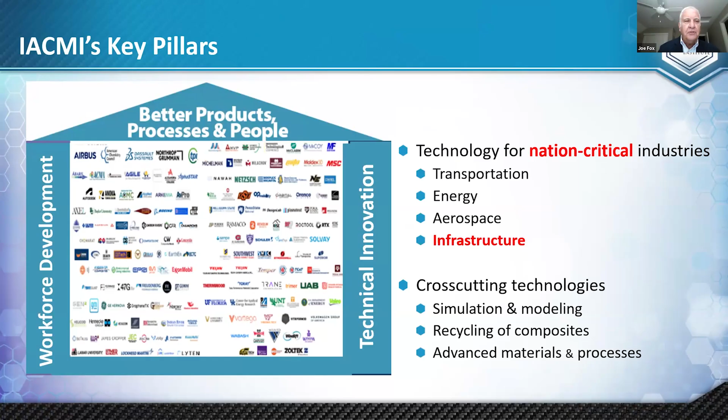Those 2 key pillars, technical innovation and workforce development, form part of a very important equation because when you add them together, it really equates to economic growth. On the technical innovation side, IACMI has completed more than 70 projects and more than 24 innovative new products have been commercialized. Some of them are shown here.

On the workforce development side, IACMI has trained more than 18,000 people of all ages, they say from K to gray, through customized education and engagement programs like ACE, ACCP, and Integrate. So in celebration of its 10-year anniversary, IACMI has put together what it calls its Project Impact Report. I was part of the team that put this together, and it really is a 36-page document that is full of impactful stories and stats from the first 10 years.

I was going to bring you hard copies if anyone was interested in this report, but if you are, I'll provide my contact information at the end and I can provide you electronic copies. It's worth a read. So now I want to move into the second part of my presentation and focus on IACMI's Infrastructure and Construction Working Group.

So IACMI's tagline is convene, connect, and catalyze, and they use various mechanisms to accomplish their mission. I'm not going to talk about all of them. I'll just highlight networking, interns, world-class facilities, world-class expertise, techno-economic analysis. I'm going to focus on the working groups. IACMI has 5 working groups, and they're all shown here. They typically have quarterly meetings, and they can be both virtual and in person.

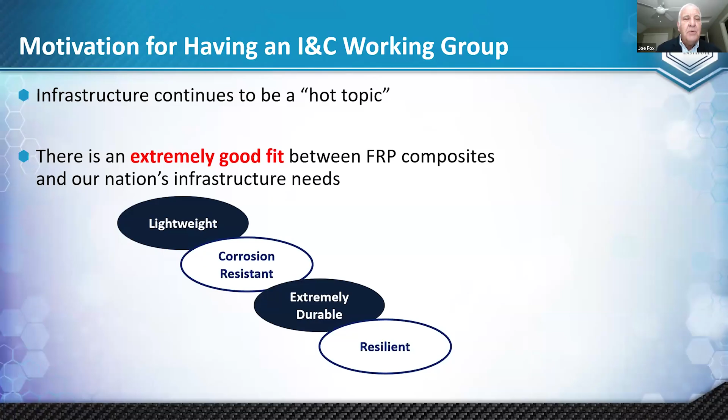I'm sure that many of you are familiar with the ASCE Infrastructure Report Card. It is issued every 4 years by the ASCE, and the most recent one was issued on March the 25th. There are really 2 documents, a full report and an executive summary, and they are both very well worth a read.

This represents a tremendous opportunity for composites. Now, they are not going to be able to get all of this $9 trillion, but even if they got a small slice, 0.1% of 9 trillion is $9 billion, and that's $9 billion of opportunity for composites.

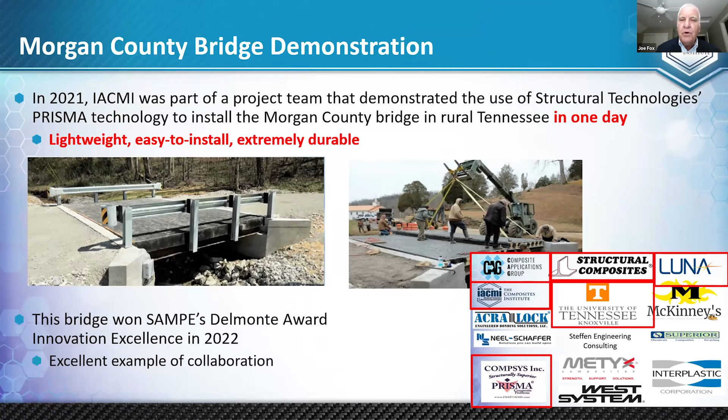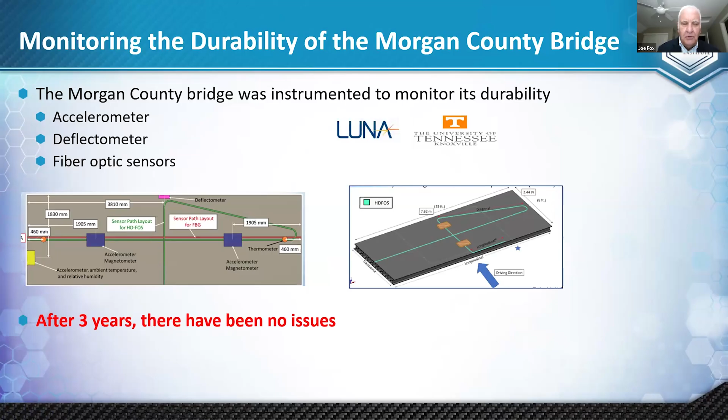And I think this project is also a very good example of cooperation and collaboration within IACMI. It actually won SAMPE's Delmonte Award for Innovation Excellence in 2022, and all of the organizations that I've highlighted there were members of IACMI. When the bridge was installed, it was instrumented to monitor its durability. That work was done by Luna Innovations and the University of Tennessee, Knoxville. And I'm very pleased to report, and John would be very pleased to report, that after 3 years, there have been absolutely no issues with the bridge.

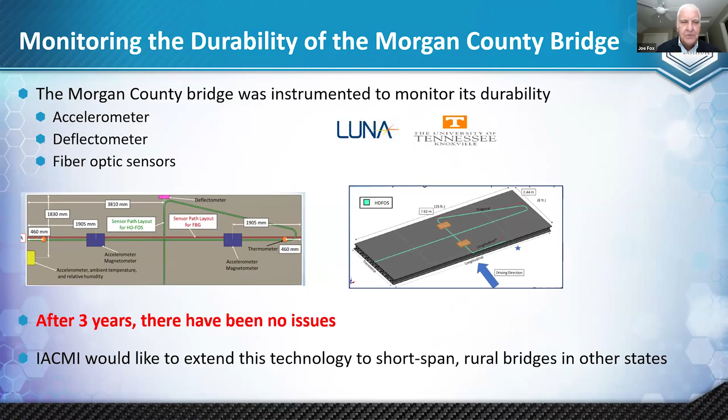And it's also fair to say that IACMI and CAG would like to extend this technology to short span rural bridges in other states. So it's good that John is there in person.

Let's move to the second project, the ASCE webinar on design. This webinar really addressed a barrier to the adoption of composites, in that many structural engineers are very comfortable designing with steel and concrete, but they're not nearly as comfortable designing with composites. So to address that barrier, IACMI put together a webinar for ASCE that really involved an all-star cast. You had Professor Dayakar Penumadu from the University of Tennessee, Francisco de Caso from the University of Miami, and the third all-star was Bill Davids from the University of Maine.

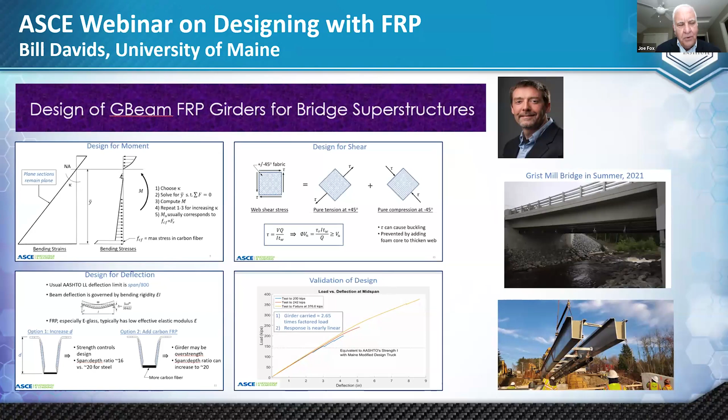He talked about design of the FRP girders, the technology that has been developed at the University of Maine and commercialized by AIT as the G-beam girders. Bill talked about designing for moment, designing for shear, designing for deflection, and importantly, about validating that design. He did an excellent job. And this type of education of structural engineers is very important. And I'm going to talk more about education of structural engineers in just a few minutes.

The third project I want to talk about has to do with fire resistance testing, which is a very important consideration for all kinds of infrastructure and construction applications. The project team for this project consisted of Trimer Technologies and Orenco. Trimer Technologies is a resin company with a novel resin system that they refer to as HARP. And Orenco is a fabricator in Oregon that produces composites that are used for wastewater treatment at ports and all kinds of applications where corrosion resistance is important.

Orenco fabricated samples using the HARP resin, and FR testing, fire resistance testing, that was specific to infrastructure and construction was conducted at the University of Dayton Research Institute and Southwest Research Institute, and that testing was funded by IACMI. And the results were very good. They achieved a Class A E84 rating and a 60-minute E119 rating. So in terms of fire resistance, they checked both of those boxes. This project was highlighted in this banner at the 2024 SAMPE show, and you can access the entire report at IACMI's website. The final report is available with that link there.

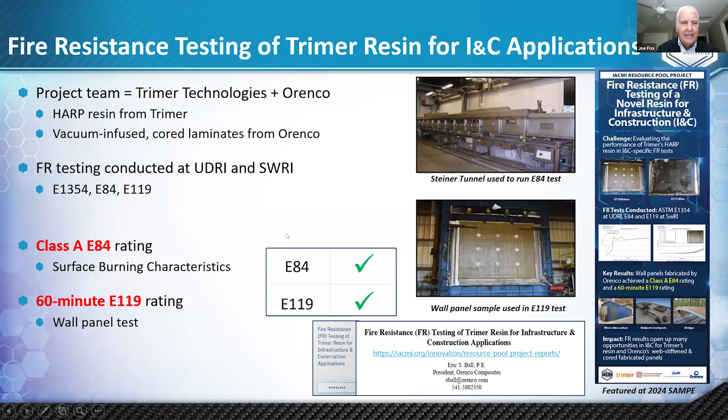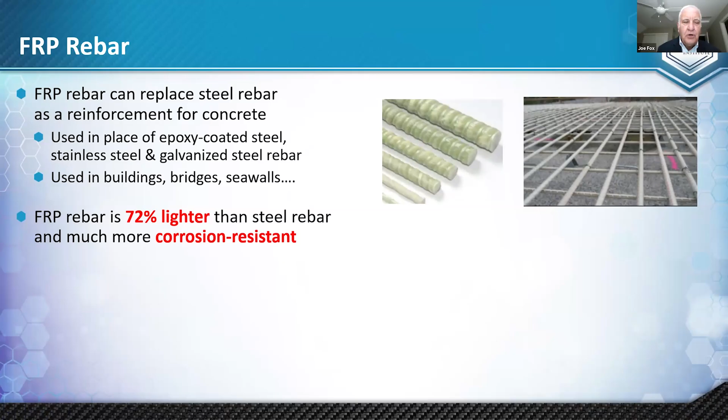All right, let's talk a little bit about FRP rebar. I'm sure that many of you are familiar with FRP rebar. It can replace steel rebar as a reinforcement for concrete. It is 72% lighter than steel rebar, and it is much more corrosion resistant. And this is actually a slide that I obtained from John Busel. It's called the I&C slide.

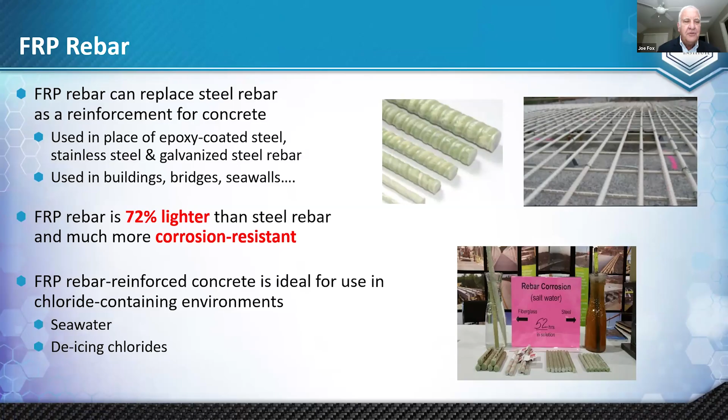It's a display at an international bridge conference, and it's a little bit hard to see, but you've got a jar here with a piece of composite rebar in salt water and a jar here with steel rebar in seawater. And after 52 days, the steel has taken on the appearance of iced tea because of the corrosion. So FRP reinforced concrete is ideal for use in chloride-containing environments where there's seawater or de-icing chlorides around. So how have people taken advantage of the corrosion resistance of FRP? Well, the Florida DOT has really been a leader in the use of all kinds of FRP composites and FRP reinforced concrete.

They've used it in all kinds of applications. This is kind of the poster child. It's the Halls River Bridge, which used a lot of GFRP rebar. So you've got a state in the south that is surrounded by seawater, but FRP rebar is also used up north. It's used in my state because the Ohio DOT has used more than 1.5 million linear feet of GFRP rebar in their bridges. And their motivation is corrosion resistance in the winter months. So you've got interest in FRP in the south and in the north.

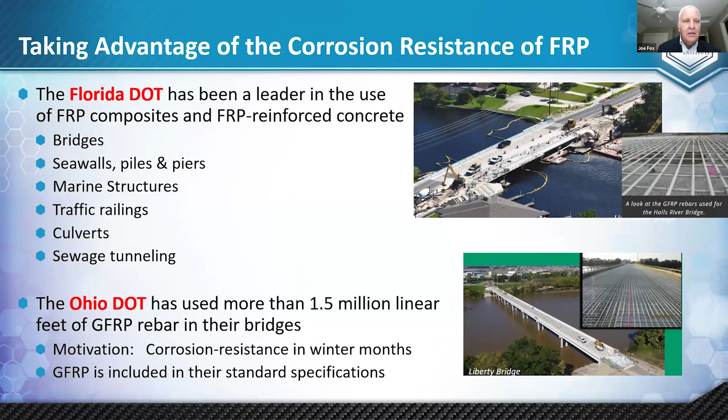So FRP rebar has been used to help produce corrosion-resistant bridges. Let's talk a little bit about the use of FRP rebar for offshore wind. I'm sure that many of you know that Maine has done a lot of work on wind energy and particularly on offshore wind. This is the VolturnUS prototype that has been deployed in the Gulf of Maine. This was actually a design project at the University of Maine led by Anthony Viselli.

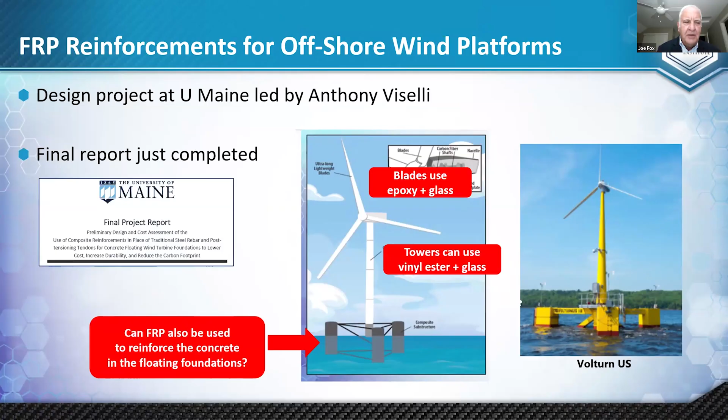And I think most of you know that the blades are typically made with epoxy and glass. Maine has shown that the towers can also be made with vinyl ester composites. The purpose of this design project was to see if FRP could also be used to reinforce the concrete in the floating foundations. Again, this was a design project and the final report has just been completed. So here are the results. Can FRP be used in these floating foundations? And the answer is yes, it can.

What the design work showed was that GFRP rebar could not be used below the surface of the water due to water tightness requirements, but they did find that FRP rebar could be used in the sections above the surface, and that is about 1/3 of the foundation. These foundations at full scale are enormous. A foundation can weigh 20,000 tons. So you're talking about 6,000 tons of concrete up here in the yellow section.

The design work showed that the use of GFRP rebar could lead to a 10% reduction in the weight of the foundation. That's 600 tons. And the reason is because you needed a lower amount of concrete cover to protect the rebar from corrosion. 600 tons of concrete means that you're going to have much lower cost. You're going to have a lighter weight foundation. And remember, these things need to float.

And you're going to have lower CO2 emissions because you're lowering the amount of concrete, which means you need less cement, which means you generate less CO2. So a very successful design project, and Anthony and his team are planning to continue to use this work as they move forward with scale up.

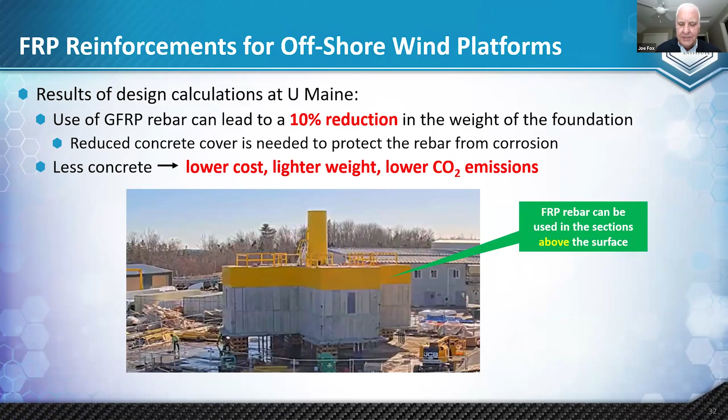Let's move from the past to the present, because now I want to talk a little bit about the decarbonization message for FRP. And this is an ongoing project. Because over the last several years, the Infrastructure and Construction Working Group has developed a very strong decarbonization message for FRP. It's very simple, that the use of composites can significantly lower emissions of CO2 and other greenhouse gases in infrastructure and construction applications. It's really a two-part message. That's true when they are used in place of steel and when they are used in conjunction with concrete. Not in place of concrete, but with concrete.

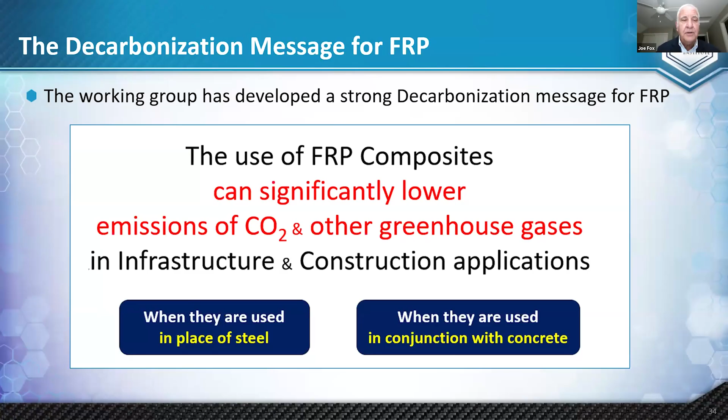So if you've attended the last two TIDC meetings, you've heard me talk about this decarbonization message, because in 2023, I gave you part one, where I showed you the reduction in greenhouse gas emissions when composites are used in a variety of applications, including the FRP girders that Bill Davids has been talking about. And I showed you double-digit reductions in greenhouse gas emissions when FRP is used.

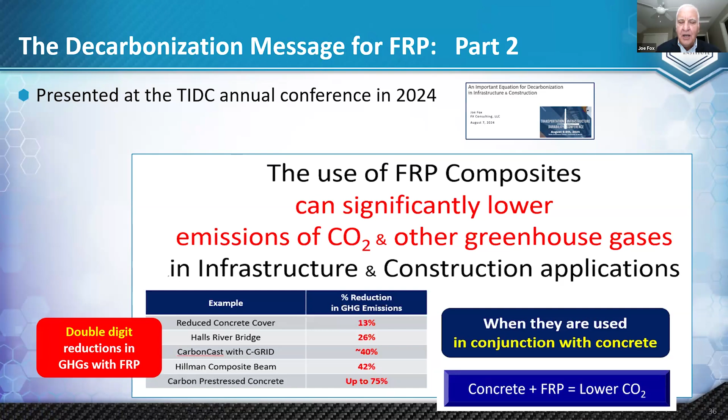And then last year, I gave this presentation and I talked about part two, because I showed you that you could achieve double-digit reductions when FRP was used in conjunction with concrete. And the reason is that FRP enables you to reduce the amount of concrete, which reduces the need for cement, which reduces the amount of CO2, just like in the floating foundations I just talked about. And I told you to remember this very simple equation. Concrete plus FRP equals lower CO2.

So what do we plan to do? Well, what we plan to do is continue to spread this decarbonization message. The working group is continually strengthening the message and finding other examples where FRP can help decarbonize. Let me take a minute and talk about the decarbonization landscape, because it has changed in the last year. It's fair to say that the Biden administration had greenhouse gas reduction as a priority. That was reflected in programs at the Department of Energy, the Department of Transportation, and the EPA.

The Trump administration has put a much lower priority on greenhouse gas emissions, and they have eliminated or rescinded many programs along that line. That said, there still remains very significant interest in the private sector in decarbonization. Nearly every major construction company has published a commitment to lowering their carbon footprint.

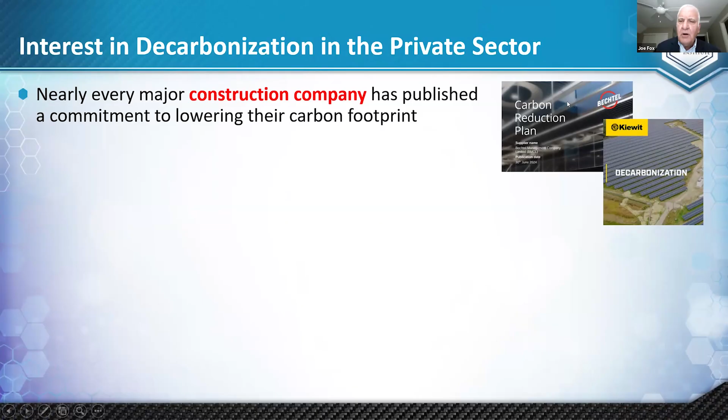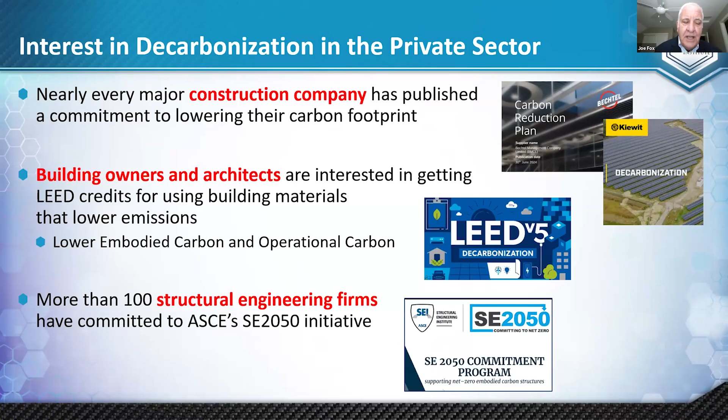Here are examples from Bechtel and Kiewit websites. Building owners and architects are interested in decarbonization. They want to get LEED credits for using building materials that lower emissions. And more than 100 structural engineering firms have committed to an initiative within ASCE known as SE2050.

Say a little bit more about that. Here is the makeup of SE2050. Again, more than 100 structural engineering firms. I only recognize two in this list, Martin & Martin and WSP. So I consider this to be a very good target audience for our message.

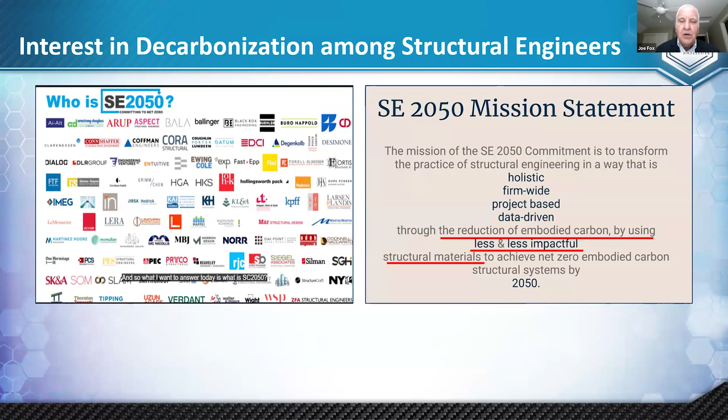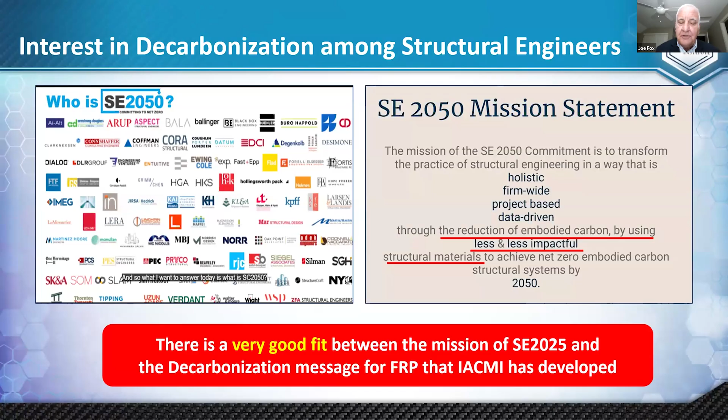Here is the mission statement of SE2050, and I've highlighted some key words. They are interested in the reduction of embodied carbon by using less and less impactful structural materials. And when you read that, there is a very good fit between the mission of SE2050 and the decarbonization message for FRP that IACMI has developed.

So what do we plan to do? Well, we're continuing to strengthen the message, but we've submitted an abstract to present at next year's 2025 Structures Congress in Boston, connecting fiber reinforced polymer composites to ASCE's SE2050 initiative. And this is the message that we're going to deliver to structural engineers.

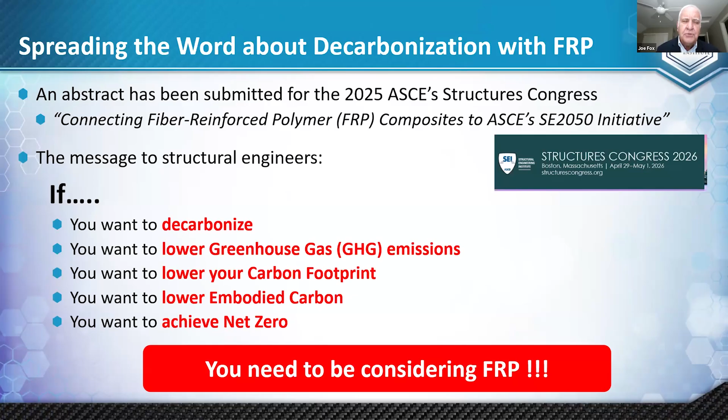If they're interested in decarbonizing, if they want to lower greenhouse gas emissions, if they want to lower their carbon footprint, if they want to lower embodied carbon, if they want to achieve net zero, then they need to be considering FRP. This kind of education of structural engineers, this technical advocacy is very, very important.

Another project that's in the definition stage has to do with updating the NCHRP report on FRP for bridges. This was a report entitled Advances in Fiber Reinforced Composites in Transportation Infrastructure. It was commissioned in 2013, completed in 2015, covered both new construction and refurbishment with composites. It's a very comprehensive report. It's more than 160 pages long, but it's a decade old.

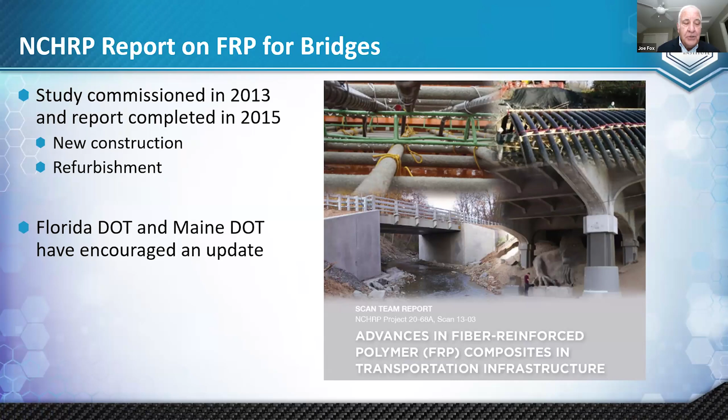It's actually outdated. And in the recent IACMI Working Group meeting, both the Florida DOT, Steve Nolan, and Maine DOT, Joe Stillwell, have encouraged an update. At the bridge conference that I was just at in North Carolina, the representatives from North Carolina and Virginia also endorsed this effort. So I would agree, because a lot has happened with bridges since 2015. We've already talked about the Halls River Bridge and the Grist Mill Bridge.

Here you've got the Michigan DOT putting these CFRP wraps on bridge columns on the largest bridge in Michigan, I-75 over the Rouge River. You've got the Harkers Island Bridge in North Carolina, the longest bridge to use FRP rebar, 3,200 feet long. So you've got a long span bridge, and we've talked about the short span bridge when I talked about the Morgan County Bridge. And it's not just highway bridges.

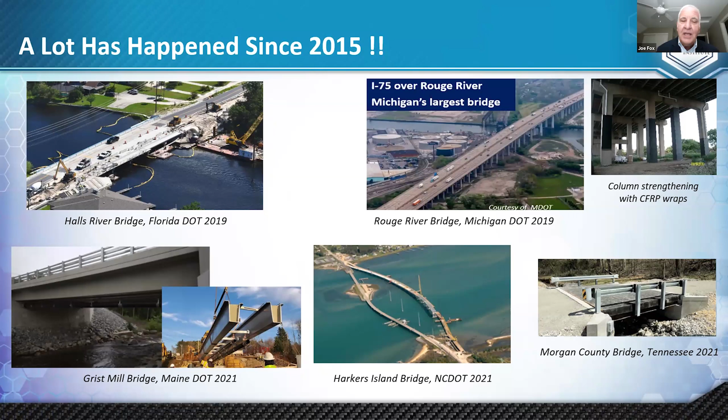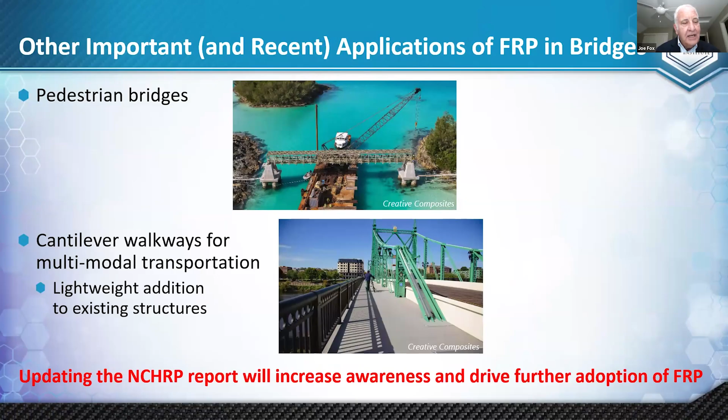You've got pedestrian bridges, like this pultruded one in Bermuda. And you've got cantilever walkways for multimodal transportation, like the one shown here. And this is a very important benefit of composites because it enables lightweight addition to existing structures. We believe that updating this report will increase awareness and drive further adoption of FRP in all kinds of bridges all across our nation. And if you're interested in getting involved in this, please see John Unser after this session.

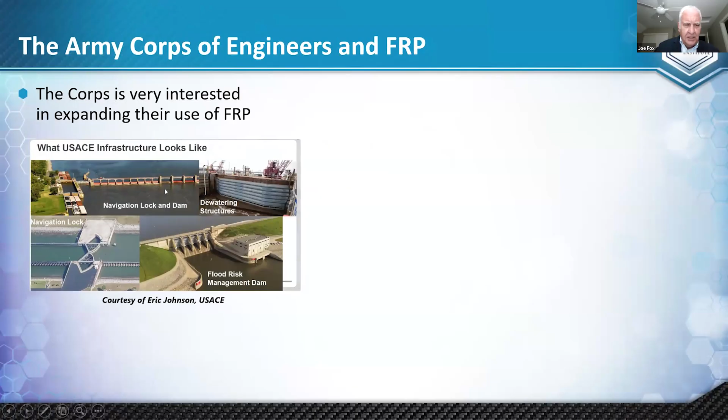The last project I want to talk about is working with the Army Corps of Engineers. The Army Corps describes themselves as our nation's engineers, and they're involved with infrastructure like for inland waterways, like the locks and dams and levees shown here. However, when you look at the infrastructure report card, the grades for those categories are very low. So there's lots of room for improvement in categories relevant to the Army Corps.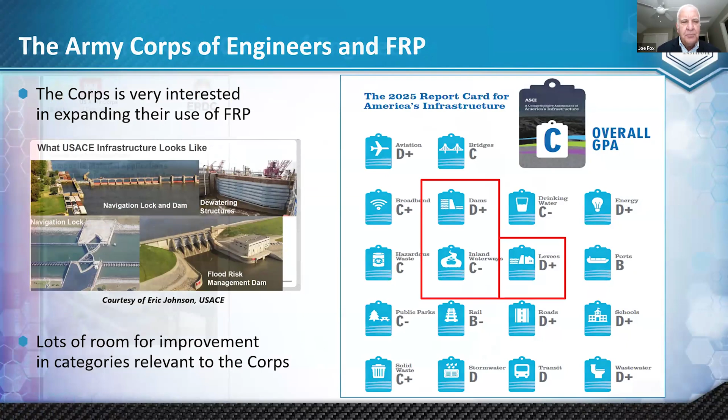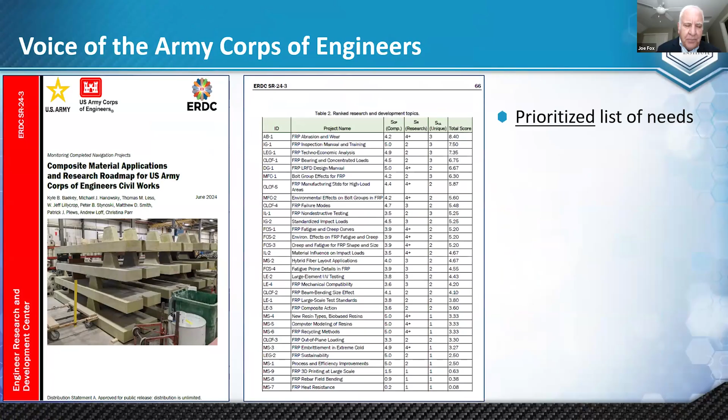They are a user of FRP, but they're very interested in expanding their use of composites. And so we've been working to develop a strategic partnership with the Corps that is based on this roadmap from the Corps, which was published in June of 2024. It gives this prioritized list of FRP needs, or a prioritized list of needs, which is exactly what IACMI is looking for.

And what we found in our initial discussions is that techno-economic analysis may be a good fit because it's a high priority for the Corps and it's a core competency for IACMI. In our initial discussions, the Corps has said they're interested in techno-economic analysis of pilings, so stay tuned.

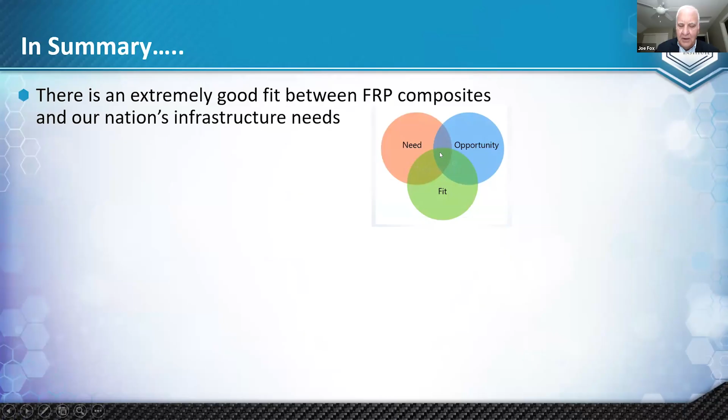So, that gets me to my summary slide. I hope I've shown you that there is an extremely good fit between FRP composites and our nation's infrastructure needs. This is a very good place to be right here. And I've also told you about the mission of IACMI's working group to increase the adoption of composites in infrastructure and construction through research projects, demonstration projects, and technical advocacy. It's been a very good first 10 years. Here's to the next 10 years.